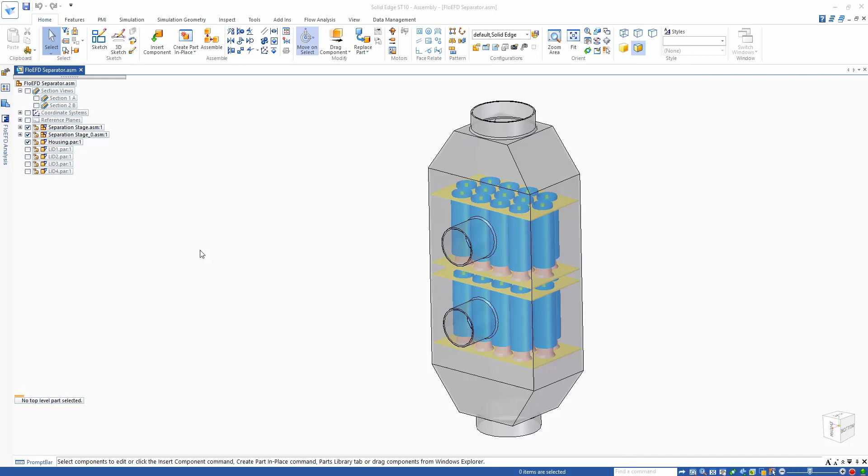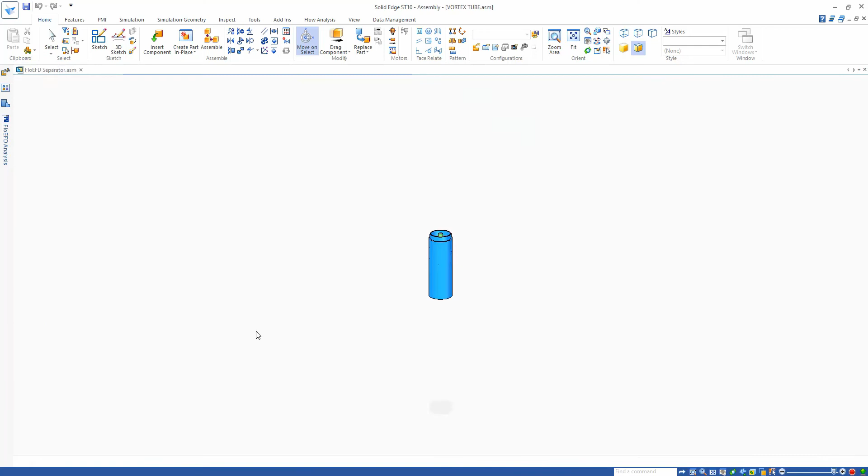Hello and welcome to this FloEFD example where we're going to be looking at a cyclonic separator, where we have an air inlet, two outlets for the cleaning stages, and the third clean air outlet. This is a passive device using vortex technology. Let's have a look at some of the design behind this particular separator. You can see we have a single spiral forcing air towards the outside of this vortex tube, so particles are flung outwards and separated from the flow as it goes through the device.

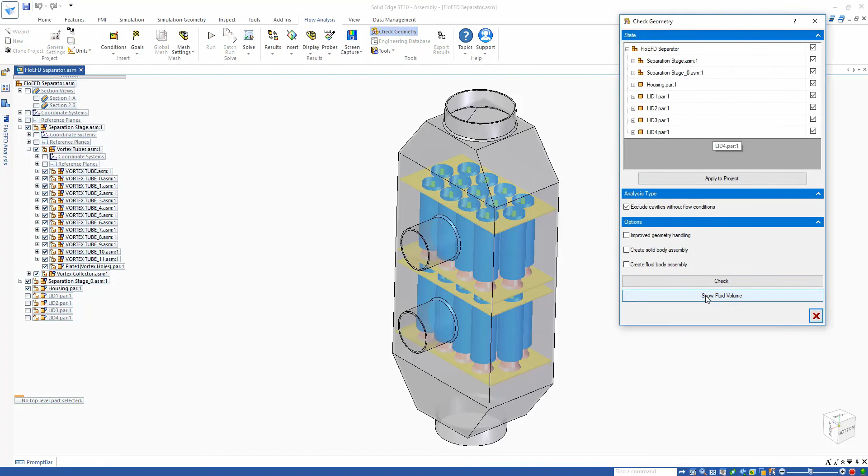In FloEFD we can check the geometry to ensure that we are getting the correct fluid region in the model, so the air cavity or air volume is correct. You can see on screen this blue volume, which is the correct air volume, so we're ready to go.

Let's go to our FloEFD analysis and look at some of the setup. Here, first of all, we have 100 CFM on the inlet. We then have 3 pressure outlets: the first stage of cleaning, the second stage of cleaning, and hopefully the last clean air stage right at the bottom.

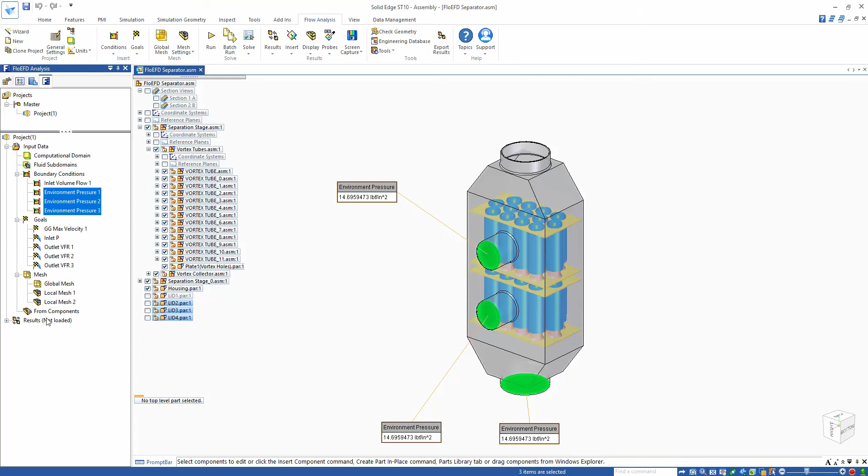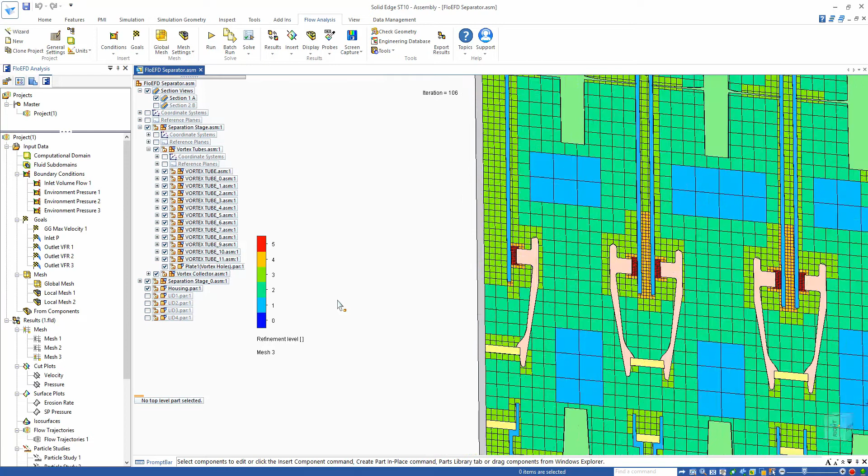Let's load the results. First, let's take a cross section. We have that there, and we can have a look at what the computational mesh looks like. FloEFD uses a finite volume mesh, and you can see we have coarse regions on the inlet, medium regions around the spiral, and a very fine grid region in red on the outlet of each vortex tube, which indicates our separation zone as particles stick to the outside of the vortex tubes. That's what the computational mesh looks like.

Let's have a look at the velocity through our model, and I can probe that now and get a feel for what sort of velocities I'm going to be getting through the model. Right, so we can see velocities there, and on the outlet as well I can see what sort of velocity I'm going to be getting.

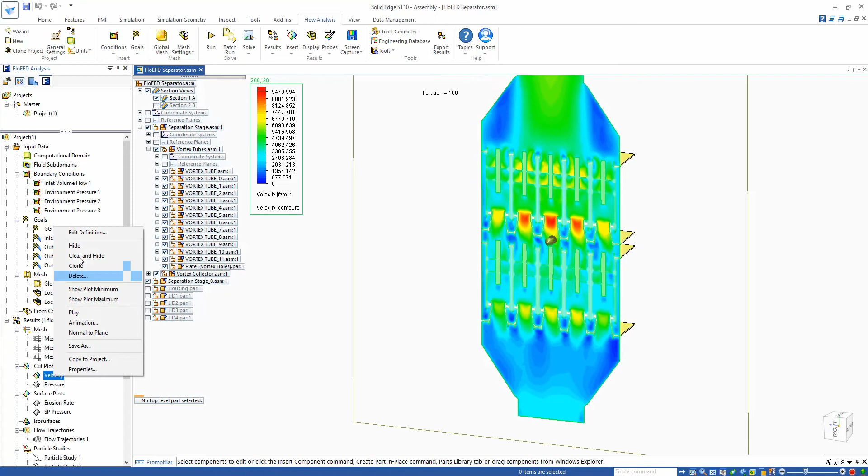We can also have a look at what the flow pressure looks like. So to maintain that 100 CFM, what's the delta P got to be? Well, we can see the inlet pressure and the outlet pressure, so maybe 0.18 psi or so upstream pressure required to maintain that 100 CFM through the unit.

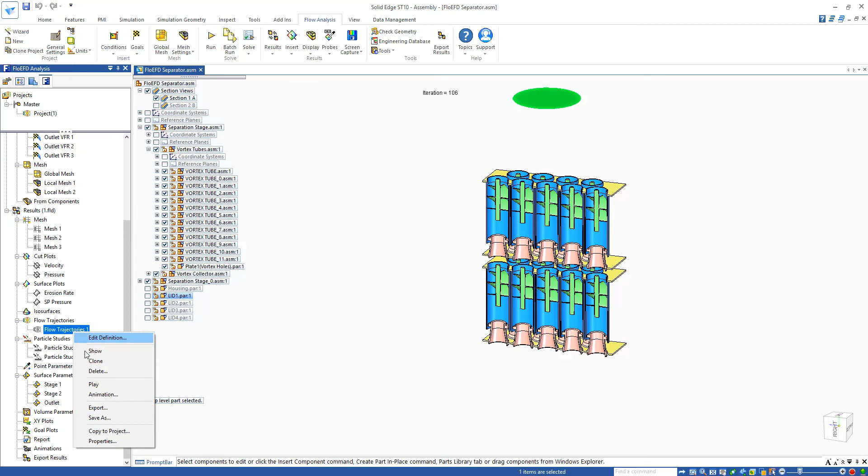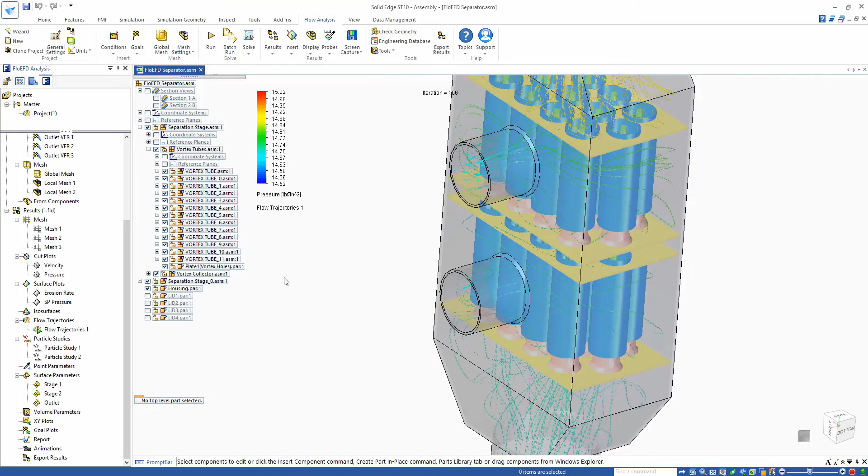We can introduce and look at some zero mass particles into the flow just to visualize what the airflow looks like. You can see there we can actually play these, bring back the housing, turn off the section, and see what the flow trajectories look like as it goes through the model. I can take this section like this and we can see the flow with these zero mass particles.

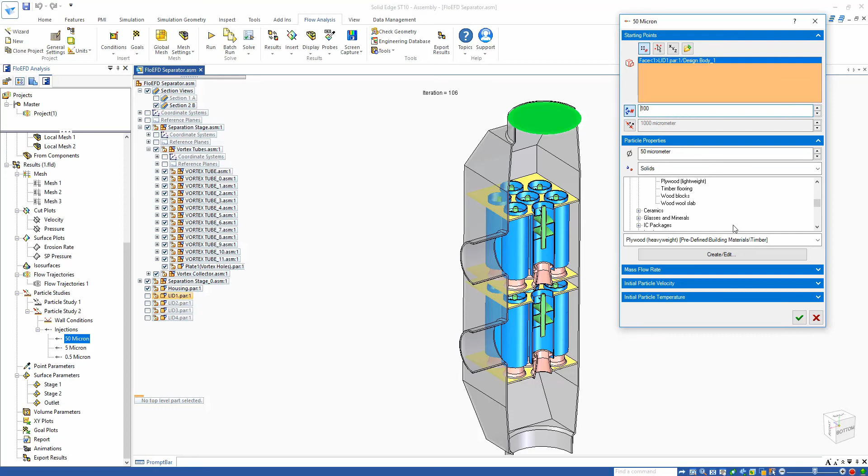Because we want to understand what the separation efficiency actually looks like, we can use something called a particle study. Let's activate this particular particle study. Now I've got 3 injections: 50 micron, 5 micron and 0.5 micron injections into this model. If I just edit this, you can see this is going to be a 50 micrometer, 1000 injections, with a plywood material on here at 50 micron, and we want to understand what the flow looks like. So let's just activate this.

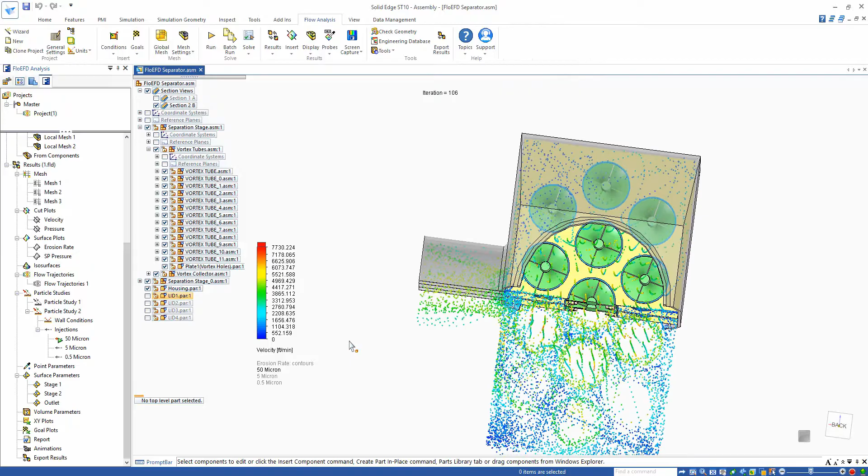If we show that now, right, so we can see the particles coming into our model. This is colored by velocity. You can see there is the swirling effect as it goes down, and how they're sticking to the outside of these vortex tubes. There's no moving parts in this, completely passive device, and you can see how it's being separated and moved out, then going out towards the outlet of the first stage.

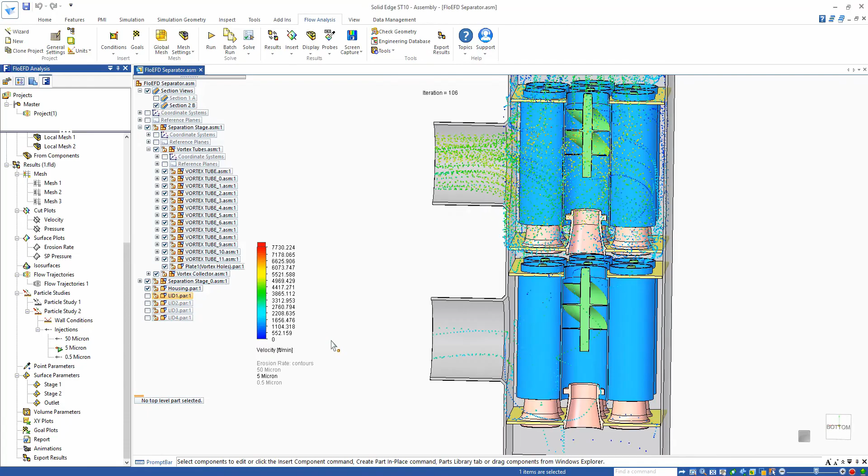A little bit gets through to the second stage, but not as much as the first stage. So the separation efficiency is pretty good for 50 micron. Let's have a look at what happens at 5 micron. Alright, so we're getting a little bit more. The first stage is taking care of most of it, but the second stage has a little bit more getting through this time, and then finally a little bit more getting through towards the outlet as well.

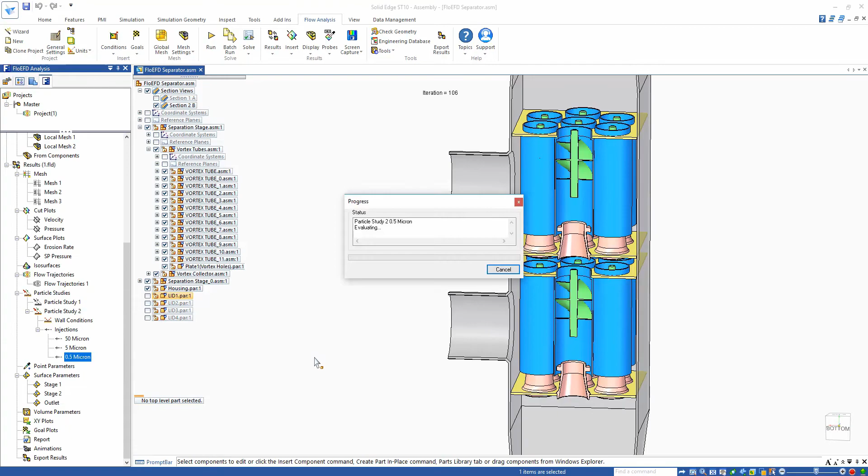And then finally let's have a look at 0.5 microns. What does that do? Well, we get a lot of separation in the first stage, a lot more going through to the second stage, but in the last stage there simply isn't enough mass in those particles, so the separation isn't as great for these 0.5 micron particles going through our separator. So we can get a feel for exactly how good the separation efficiency is.

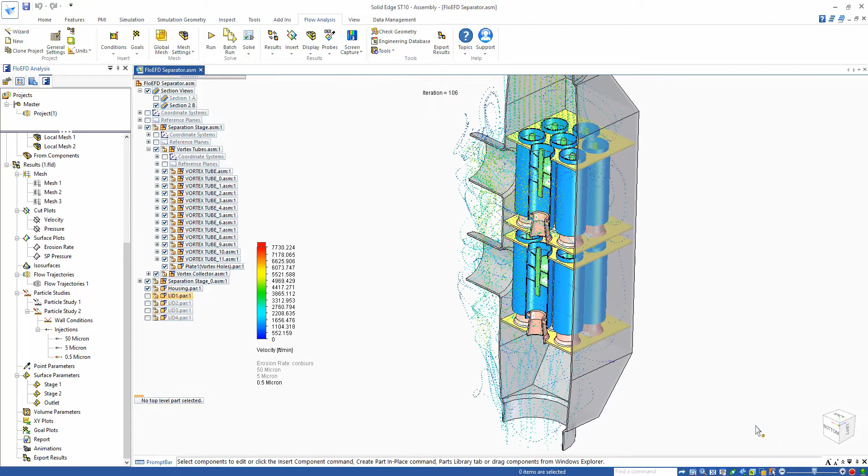The way to visualize that is to use surface parameters. So if we look at our stage 1 and show what that looks like: in stage 1 we're removing 98.5% of the 50 micron particles, 93% of the 5 micron, but in the 0.5 micron we're only removing 32.4% of those particles out of 1,000.

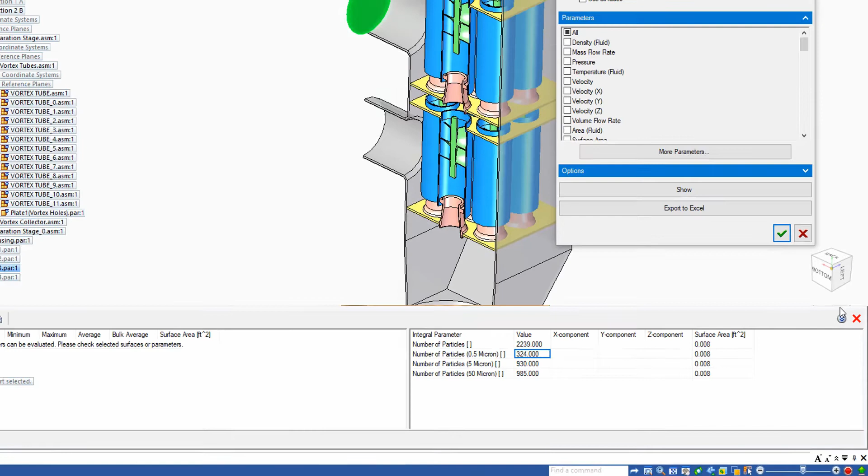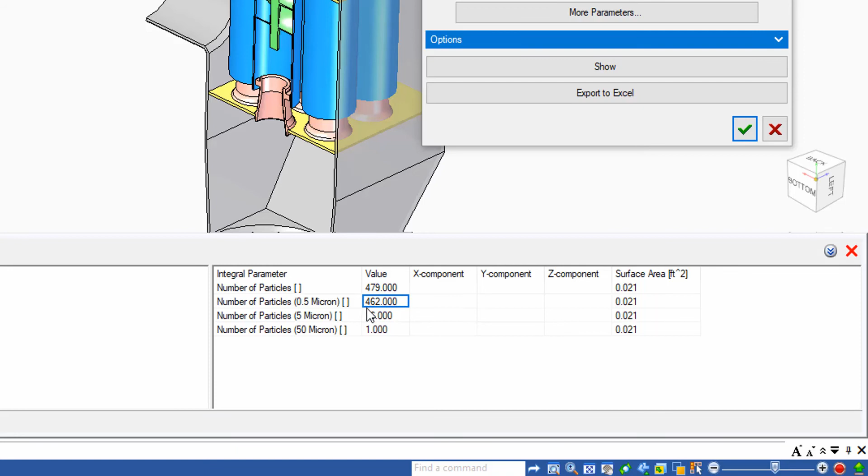And then finally, if we look at the outlet to understand how many particles are going down there, we can see that only 0.1% of the 50 micron particles are getting through, but for the 0.5 micron, 462 of the original 1,000 particles are getting through. So only a 53% separation efficiency at 0.5 micron.